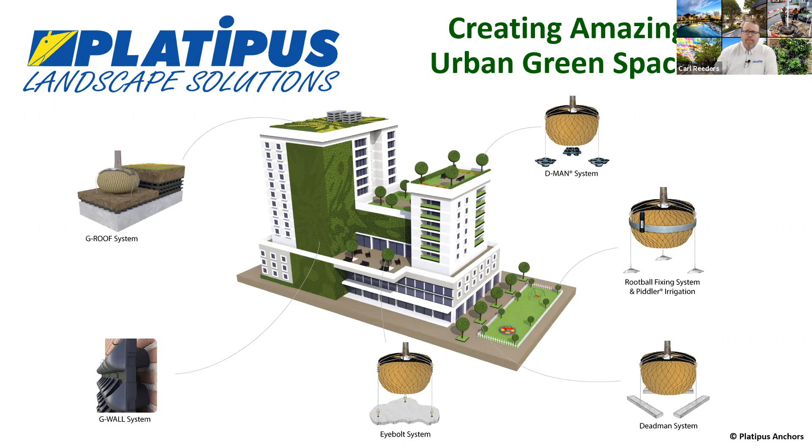I think what we'll do next is talk about who we are. Platipus Anchors started manufacturing anchors almost 37 years ago. We have a global presence all around the world, with offices in Germany and America, as well as distributors all the way down to Australia, Hong Kong, etc. We are an ISO 9000 approved company. We have a very strong relationship with our landscape industry colleagues. We believe very strongly in giving the very best support and workmanship we can, and we've hopefully carried that through into what we do and how we operate.

We won the Bali Service Award last year at the Bali Awards. We love and support Perennial, which is our chosen charity. We've also done good work with the guys at Veterans Growth, another fantastic charity. So we try to get involved and give back as much as we possibly can. We continuously innovate, and that innovation has recently brought forward, as I mentioned, two new products designed to help guys like yourselves make the best urban green spaces you possibly can.

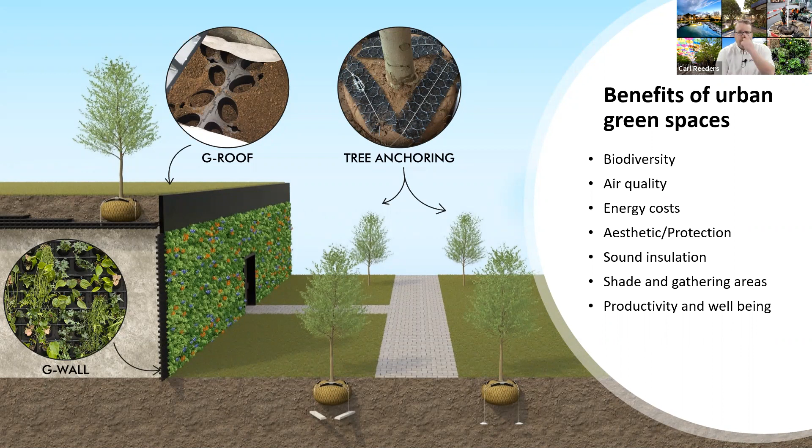Starting with G-Wall, it's a modular living wall system. The picture shown is a beautiful design from the winner of a competition we recently did, blind judged by Anne-Marie Powell, who we're very proud of our association with. It's a fantastic, lovely design, and the lady who did it is very talented. She's a remarkable designer, and we couldn't have been happier.

We came to design G-Wall after traveling extensively. We went to Singapore and saw how they had the mantra of bringing a city within a garden, as opposed to a garden within a city. They really managed to capture a natural biophilic design, and we thought, how can we bring that forward into the UK, into places like London? How can we assist with that?

Our conclusion was that we needed something everybody could use. We needed to open up the market, designing a simplistic, easy, affordable option so everyone can design their own green walls and access vertical green space. There are big, arrogant companies out there that control design, manufacture, installation, and maintenance. We said no, we need to give an option to every mom and pop shop around the corner who might want to do one green wall every couple of years. They need a solution they can access. Opening it up to everybody will hopefully improve our urban green spaces and give real solutions to people. The concept has been fantastic.

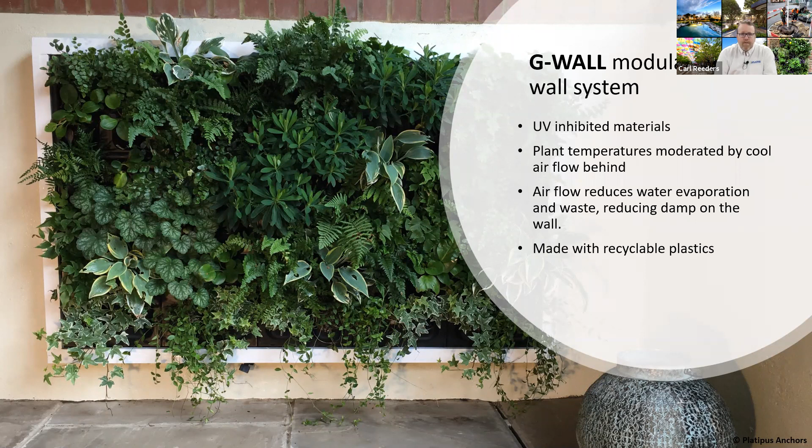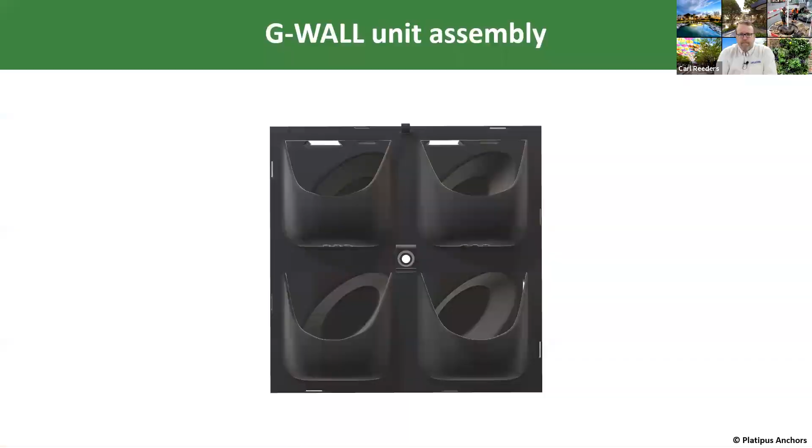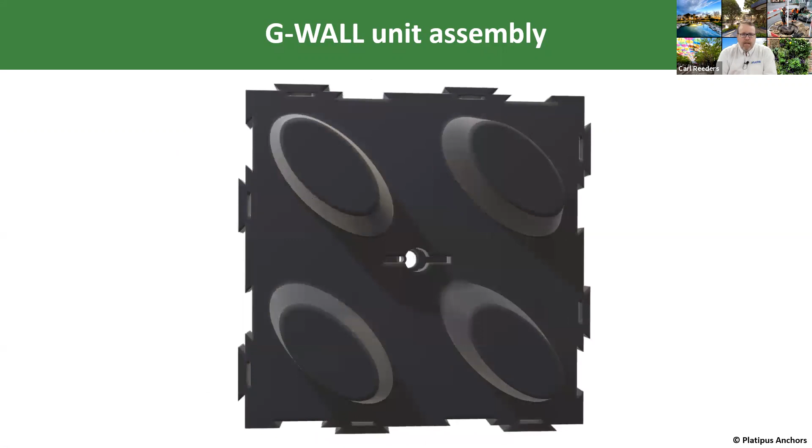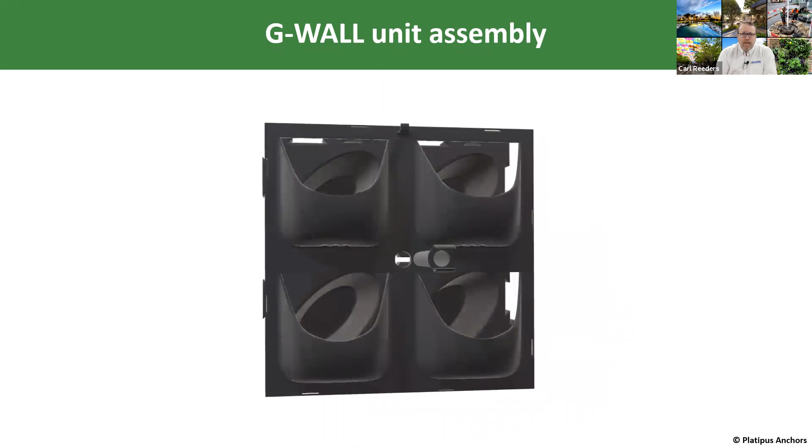This is the G-Wall unit, a simplistic piece. It embraces our D-MAN cell system, which is award-winning, for the backing plate. It's robust, made out of recyclable plastics, so it has that sustainability. It lasts incredibly long, designed to last. It takes a P9 to P10 size pot, about 10 centimeter pots, so you can really get in there and design some amazing things.

I think the best way to look at it would be through an animation to really give you the best feeling for it.

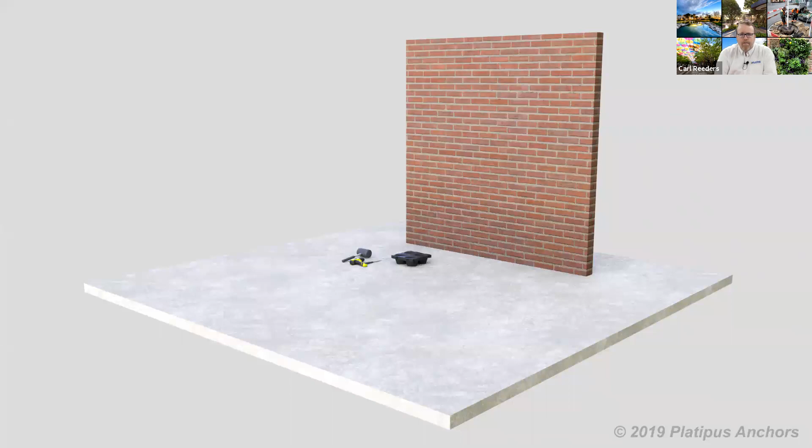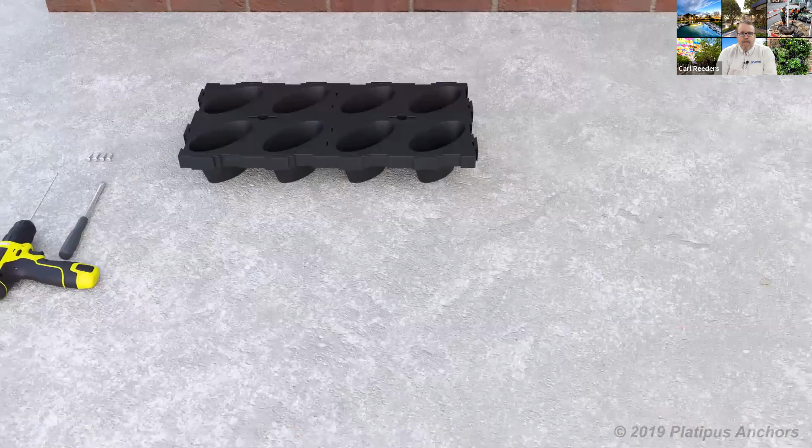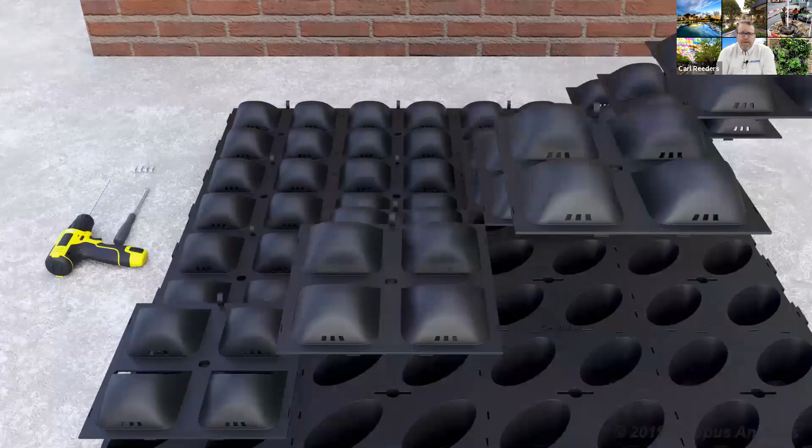This is a simplistic animation, but it does a good job showing what can be done. You've got your D-man cells, the backing plates, laid out and tapped together - very firm and snug fit. This is a square meter, which will have 16 cells, or 64 individual planting pots for your design. The fascia plate gets clipped on, and as you can see, there are drip-through holes allowing water to drip through into the preceding pots. The spigots go in, with two functions: one to hold the irrigation pipe, the other to attach the system to the wall.

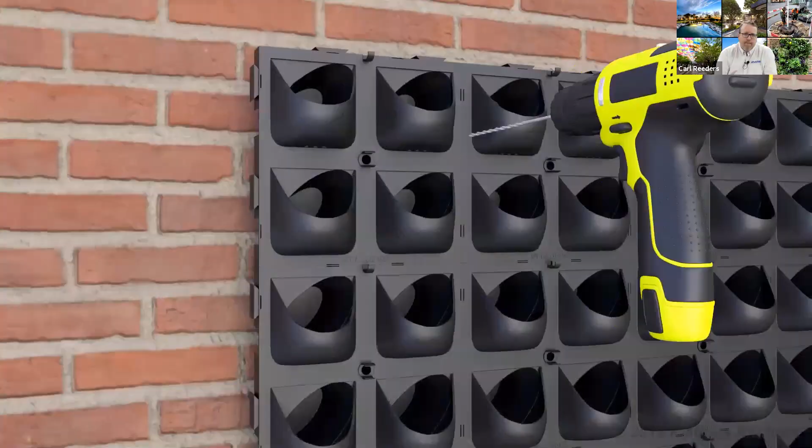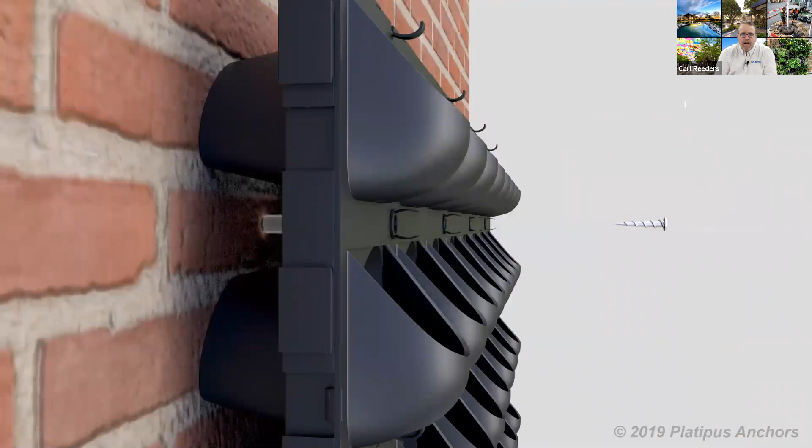It's important to note the system has no battens, rails, or hanging skeletons - it goes directly onto the wall. You'll see there's great space behind the cell, which allows for aeration and stops mold from growing on the surface. It's very simple to use. Those are the wall dog screws - very tough, with great load capacity, and they hold it snugly.

We don't supply irrigation because we want this to be a flexible experience for you, so you can go out and design your own thing. We give you the space to clip in the irrigation piping, but in terms of where and how you plant it, whether it's sun facing or in the shade, and what plants you use - that's entirely up to you.

As a result, the irrigation is not something we can supply. You'll need to do that yourself, but it's simple enough. I've done it, and I'm pretty useless when it comes to DIY stuff. It works easily, it works effectively.

So that's the G-wall. Very simple to install. Took me about 2.5 minutes to put up a square meter. Clips in nice and tight, as I said, and up it goes. Plant it on the wall if you want to, or don't. It's not that heavy either way. You can plant it on the floor.

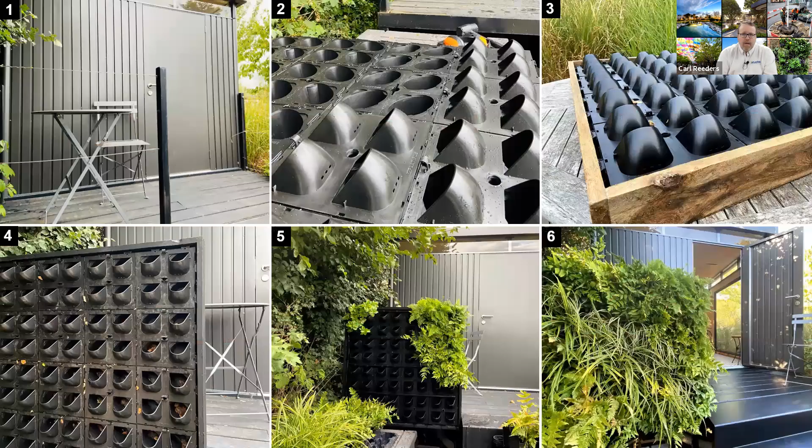Another simple example is from one of our fantastic design colleagues who did this G-wall you see in front of you. There were 6 steps she went through. She identified where she wanted to place it, built her square of G-wall, put a lovely frame on it, placed it up, and planted it. It was a superb design. She was another of our runner-ups in the competition, did a fantastic job, and took beautiful photographs of it. We're very proud of what she did.

All we do here, once again, is give you the plastic square meter or more, depending on how big you want your wall, and let you get on with designing your urban green space, because nobody understands urban green spaces better than you do. We're merely here to try and help by giving you products that are easy to use and reliable.

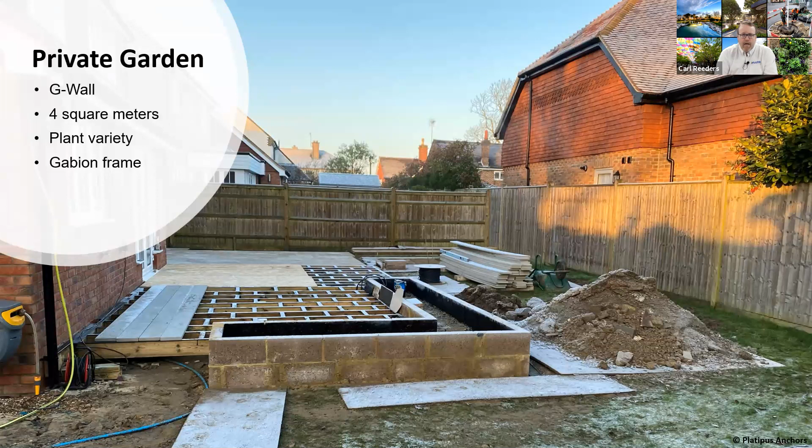One of our case studies was a private garden. One of the garden designers did a fantastic job. He took the garden - they wanted a nice centerpiece for the entertainment area. The customer chose a 4 square meter green wall. They erected it completely how they wanted to, on the floor. They put the whole piece together themselves, raised it up in one movement, and then planted it.

They put beautiful sidewall gabion frames around it. It just looks fantastic - it's the centerpiece. It attracts people, it's eye-catching. It really maximizes the space and gives a lovely center of attraction. It was a fantastic effort. The garden designer and contractor who did it is a fantastic talent, well known in the industry, and we couldn't be more happy with the work he did. It continues to be one of our favorite pieces.

We've seen future pictures and visited the site. The plants are well established, looking gorgeous, in great condition. So all in all, a fantastically successful piece. The garden designer is a real talent and a real treasure.

Right, moving off G-Wall to G-Roof. G-Roof also uses our demand cell as a basis. It is a structural and drainage solution. We thought about how we could really help people with their urban planting situations and roof gardens, and came up with this unique system. We think there's nothing else like it on the market.

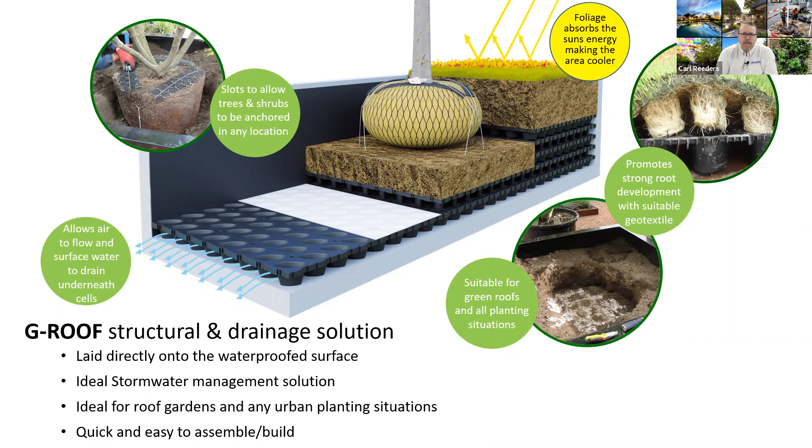It really allows beautiful water retention, as well as amazing drainage. It's strong, it's durable, and gives you really good load-bearing capacity. Each of those cells will take about 2.5 tons of compressive weight. It's just a quick and easy thing to install. I think what would really help you to see is if we showed you an animation.

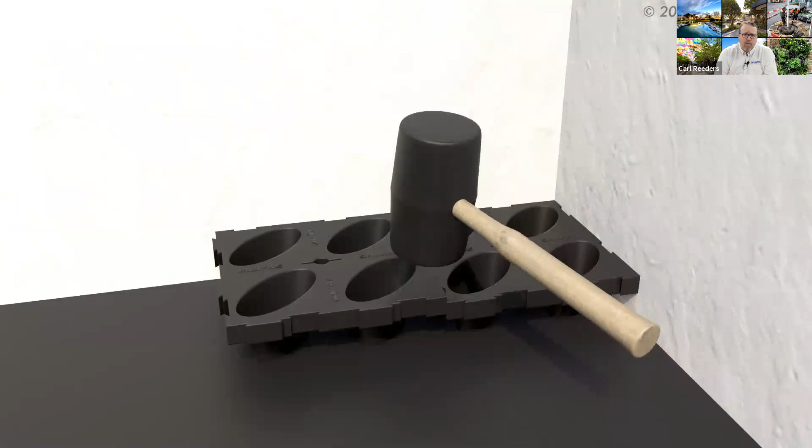The size of these individual cells is only 25 centimeters, so it allows you to really lay your floor to measure. It can use any of our D-Man Platipus anchor systems to go with it, so you can anchor your tree straight onto the drainage layer, which is completely unique. Once again, this is very strong - there's nothing like it on the market in terms of its strength and its capacity for water retention. It's an amazing piece of usage for this particular cell.

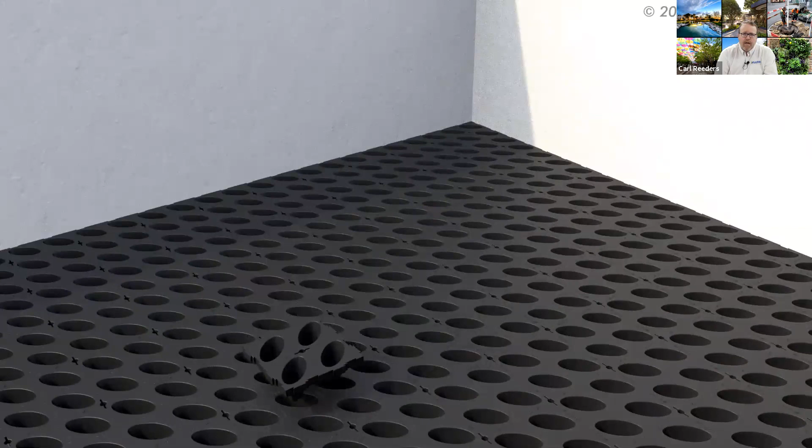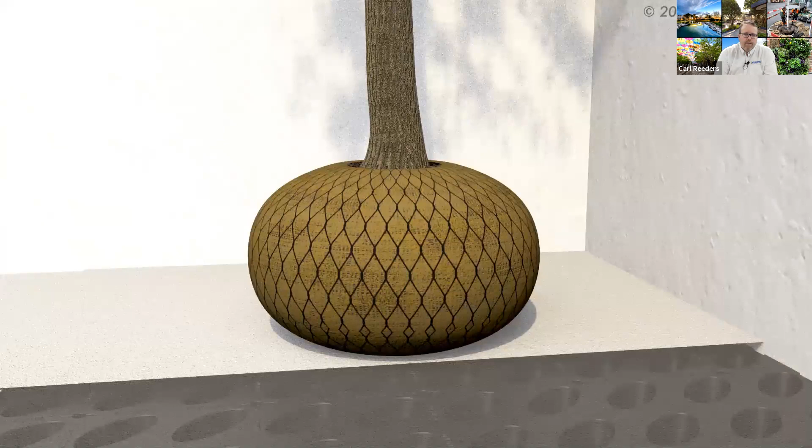You can turn them 90 degrees and they clip into each other. You can use them as a void filler - instead of using things like polystyrene, you'll get far more benefits out of it. You then put a geotextile, like a filter fleece layer, over it. And here comes a tree to show you how it connects in. Obviously, you want to anchor your trees if they're on a roof garden, or even anywhere in the urban environment.

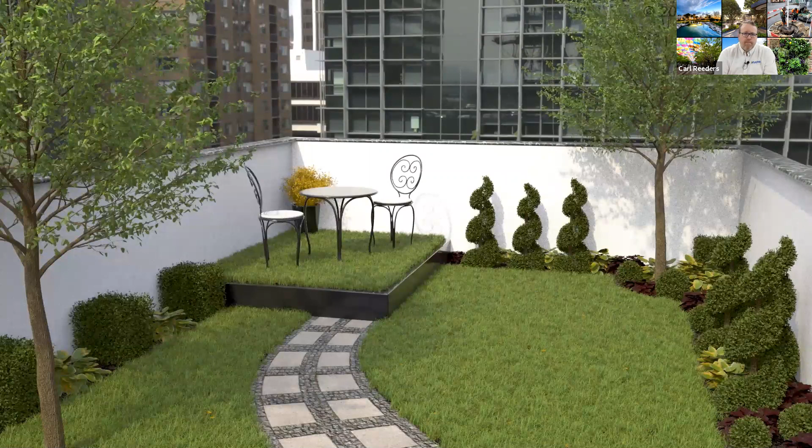Backfill, and away you go. So that is a unique system. There's nothing like it on the market. If you want to discuss more about it, please get in touch with us. It is definitely something worth discussing and discovering the potential. That is our G-Wall modular drainage solution for urban planting. It does amazing work with stormwater management as well. We're very proud of it, and happy to talk about it further.

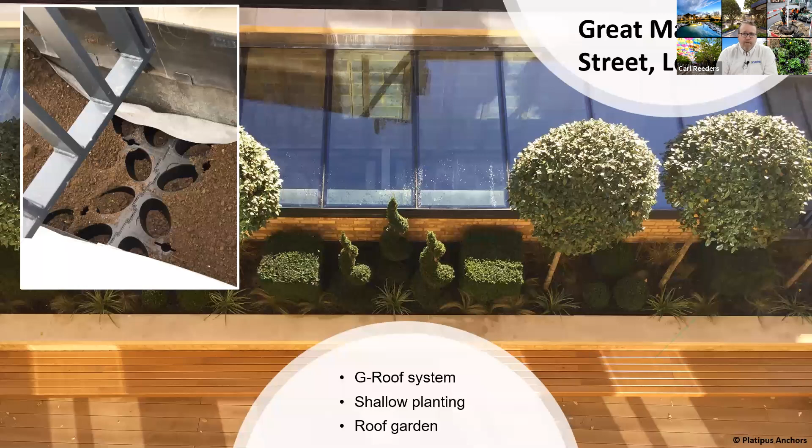This is one of the case studies we did, Great Marlborough Street. We had limited planting capacity. We needed to anchor the trees as well as provide them with drainage and support, so we used our G-Roof system all along the bed. The results were very good, very positive. The garden is still going strong, well established, and all in all, a positive case study we're very proud of.

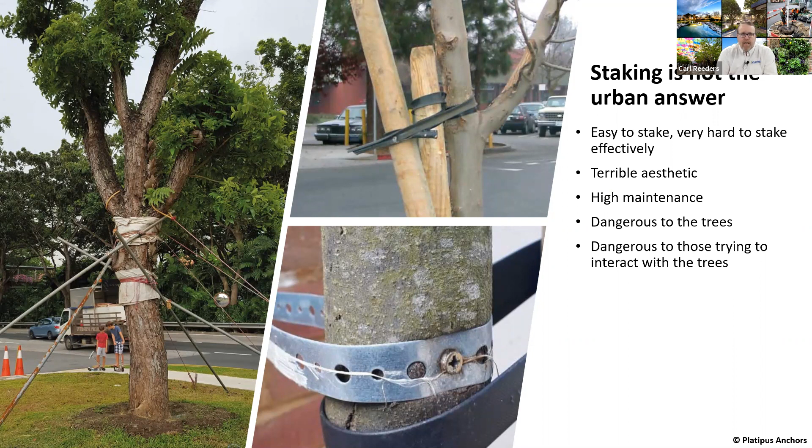Right, moving on to root ball anchoring. Now we've all seen staked trees. Everyone does it, very few people do it well. It's an incredibly high maintenance way of anchoring a tree. The aesthetic is horrendous, and the safety and security of the people around it and the tree are questionable. The number of times I drive past a tree that's been staked and see it hasn't been adjusted or maintained in ages - the tree has taken off, absorbed the rubber strap, or moved up and taken the center bar with it.

It's a horrendous way of anchoring a tree, and frankly, one of the main reasons why we designed the very first root ball kit all those years ago. We do it to get the fantastic aesthetic. We want fantastic safety and security for the tree as well as the people around it. We're looking for brilliant root establishment and minimal interference. These are all important aspects that need to be considered when you want to take care of that tree you're planting. At the end of the day, the results are far superior to any form of staking.

So if you're looking to anchor a tree in an urban environment, staking is not the solution. You want to be looking at root ball anchoring for all the maximum benefits, and to really maximize the benefits of that urban green space.

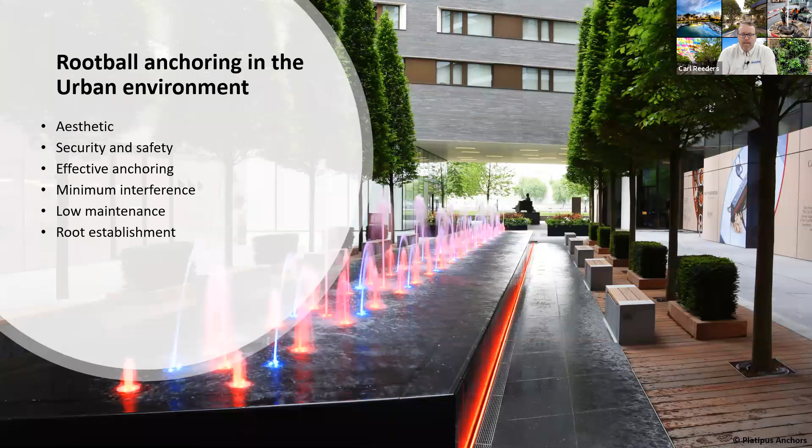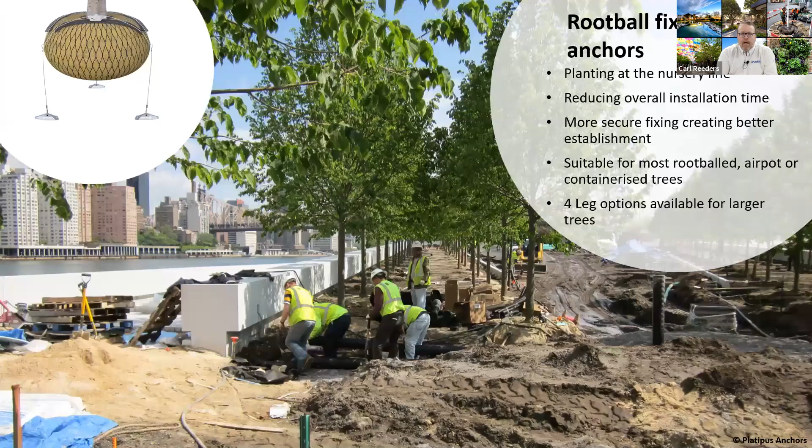Right, moving over to America, we've got the Four Freedoms Park. It's a delightful park in the center of New York, absolutely fantastic. We anchored this with our root ball anchoring kits - we drove in anchors here. It is an urban site, well used, documented on TV, etc. It's just a fantastic example of the type of aesthetic you can get from anchoring your trees by root ball. It brings me to our actual root ball fixing with anchors.

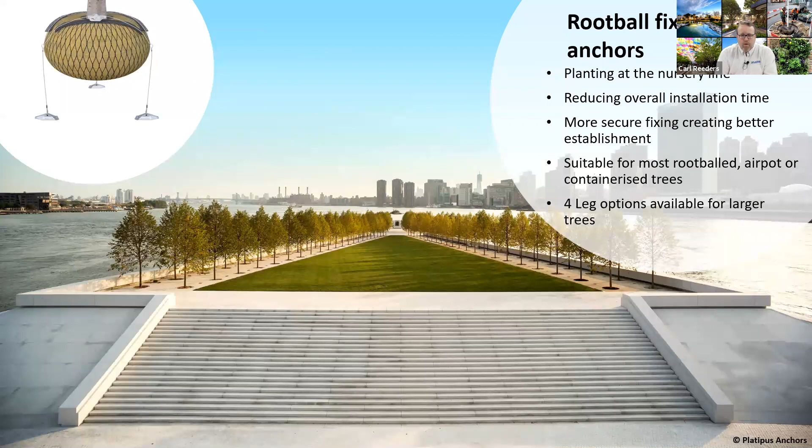There's some pictures of it being installed in the back there. These systems are our anchors with the best load - they're the best capacity for up to 20-meter trees. 4-leg options are no problem. You will get your best load with a root ball fixing with anchors. These are earth-driven anchors, percussion-driven, so they get driven down into the ground. They were our first type of anchor that we designed, and we have used them all around the world very successfully. It's what we're known for. It's easy to handle, and these are easy to install systems.

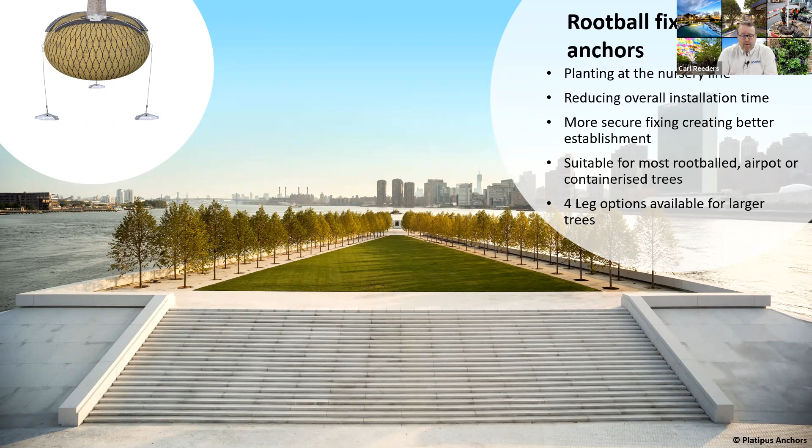They obviously then - we developed our strictly urban solutions from them, because we needed to do certain projects.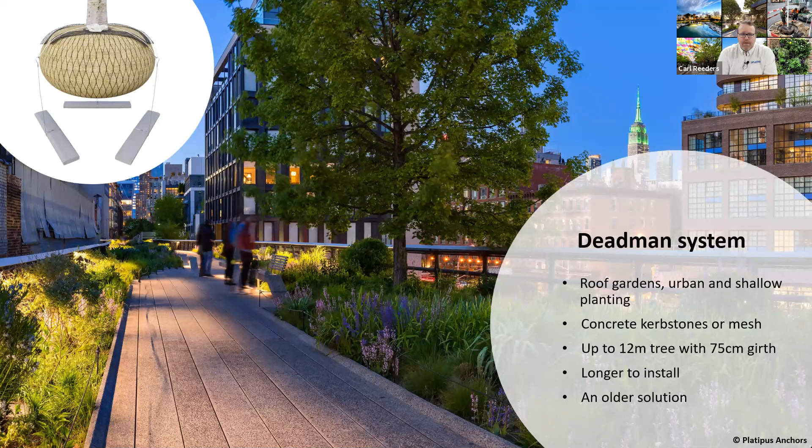Here you can see the Highline at night. We used, as I said, our dead man system. You can use it on trees. The slide says up to 12 meters, but we have had bespoke kits that go beyond that. You can use these systems pretty much anywhere. They do use concrete stones or curb stones and/or mesh as options, but that can be heavy and difficult to operate. It's also an older solution, and quite a bit more labor intensive when it comes to an urban solution. That being said, it is used all around the world very successfully, and we've had some fantastic projects with it - like there's another picture of the tree canopy at the Highline project, just offering you really fantastic place to get away, to focus, and to enjoy nature.

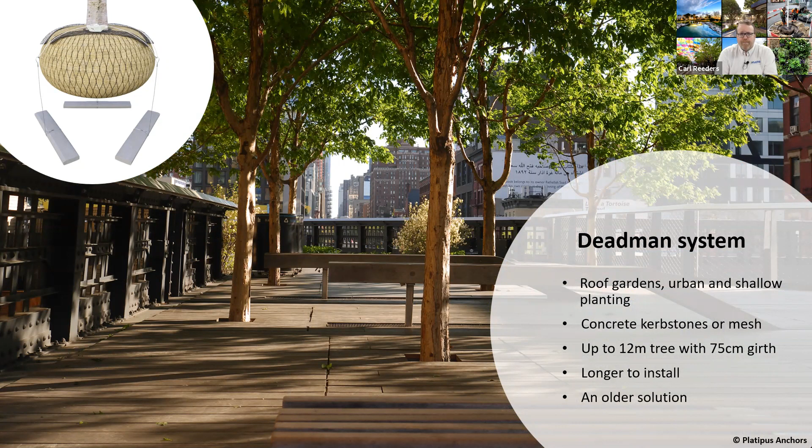The dead man and its limitations gave rise to our D-man system, which has become our preeminent urban tree anchoring solution, ideal for things like roof gardens or where you've got buried surfaces, shallow planting. It's a lightweight stackable cell - as you can see, it is the same cell we use on our G-wall and G-roof. It's quick and easy to use, less labor, faster installation times, good water retention for difficult environments. It's just become the preeminent system. And I think the best way to understand how it works is via an animation.

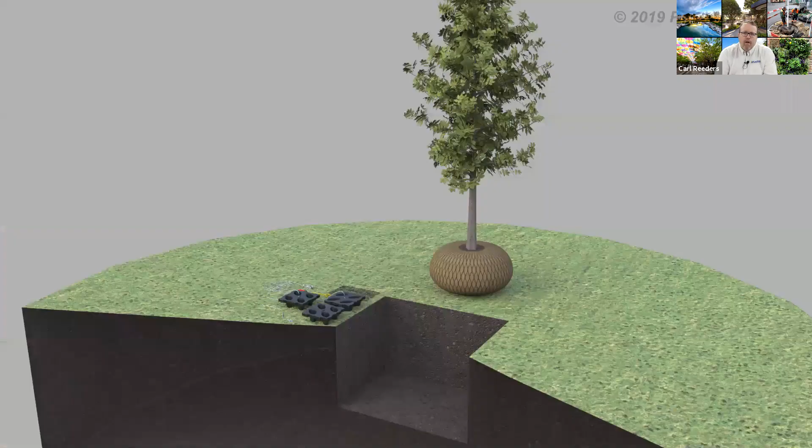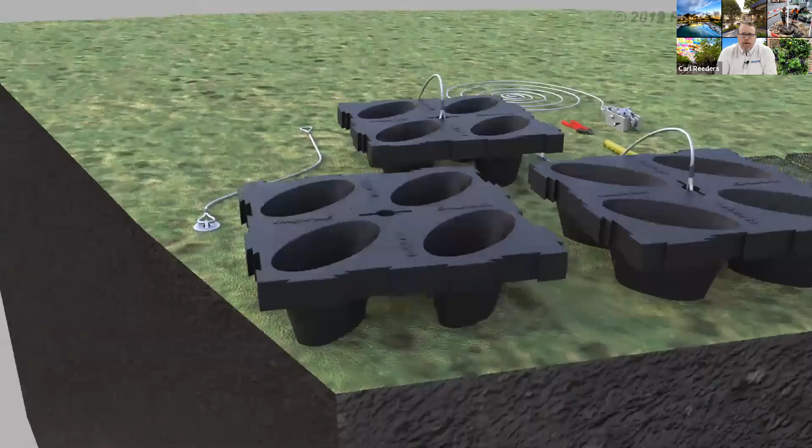So you've got your tree pit. Your anchor legs are inserted in a letterbox style, and they are placed around.

Now, what's important to note is, obviously I said shallow planting. This is also perfect for places where there's made up soil, so it's not virgin ground. You can use it there too. It doesn't have to be just the urban environment.

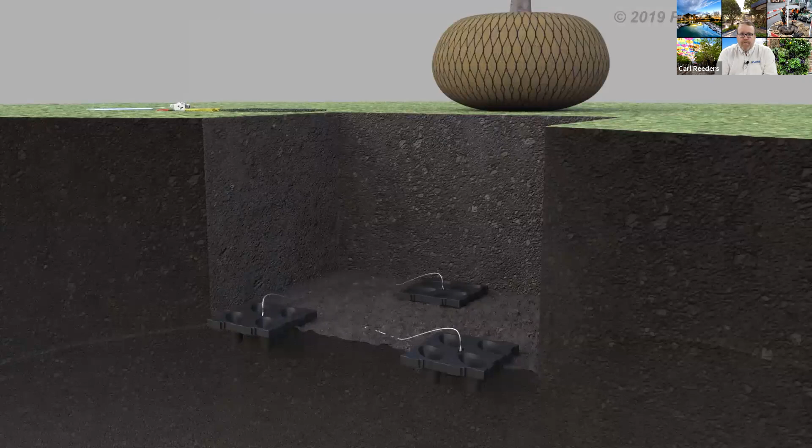The soil is put down. It's compacted by body weight. We don't want to over compact the soil, so you're just putting in enough weight that you can manage. Don't ever bring a machine in here to compact the soil. It's not necessary.

We're looking for 30 centimeters, or 300 mils, of soil between the cell and the base of the root ball. So it is incredibly shallow. Very effective solution.

You put your platimats down. Now the platimats are designed to protect the root ball. Your root ball is key. It's got to stay intact. It's got to stay well taken care of.

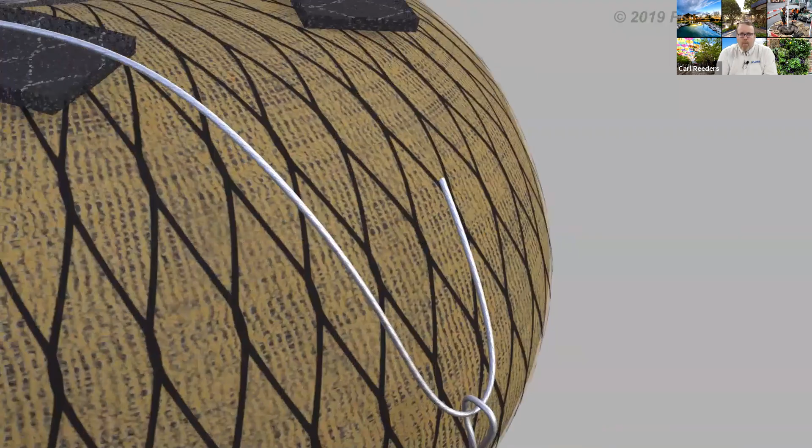So those platimats are just there to stop the load of the root ball anchoring system from in any way hurting the root ball. Our unique bidirectional ratchet system pulls from both directions, making sure that your load is even. This is ultra important to ensure that you get nice level planting.

You then ratchet it up using our special ratchet tensioner handles, which are very comfortable and easy to use. You get fantastic leverage on that ratchet. And if you're a small person planting and you're alone or whatever, it really does help you get the load you need onto those tree anchors.

In that position, you can now backfill. And that applies to any situation, whether you're planting into a planter or you're on a roof garden, it doesn't matter. That's how the system would work.

We've recently done a project completely out of the urban environment, but they've brought in made up soil, and that's where this also comes into its own. The earth-driven anchors I mentioned previously are not ideal for made up soil. They're more designed for the virgin soil environment, and these are perfect. You only need one tool as well, which is the little ratchet tensioner handle.

When it comes to other solutions, we have every solution you could require for an urban environment. Doesn't matter, you can go from eye bolts to mesh. It really doesn't matter, we need you just to talk to us.

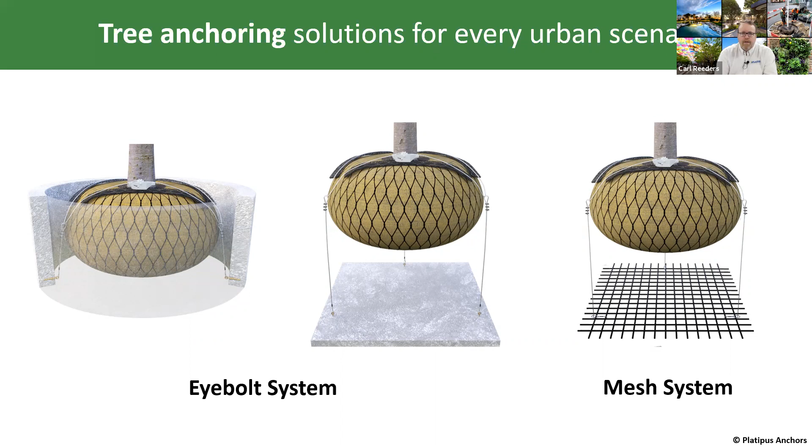This is another example of where we got involved and discussed the situation. Beautiful project, a post building in London, which is an old post sorting office. The multi-stem trees needed to be anchored effectively. We discussed it with the planter company that made the planters. They put in anchor points, and we provided the kits that allowed the trees to be anchored directly to the planter. The result is pretty good.

They put up green walls there too, which also added to the vertical green space. Keeping in mind they were working with an established building, I think they took that very concretey finish and really put some green in, which was a great effort and made it quite a nice space. So well done to them on that one.

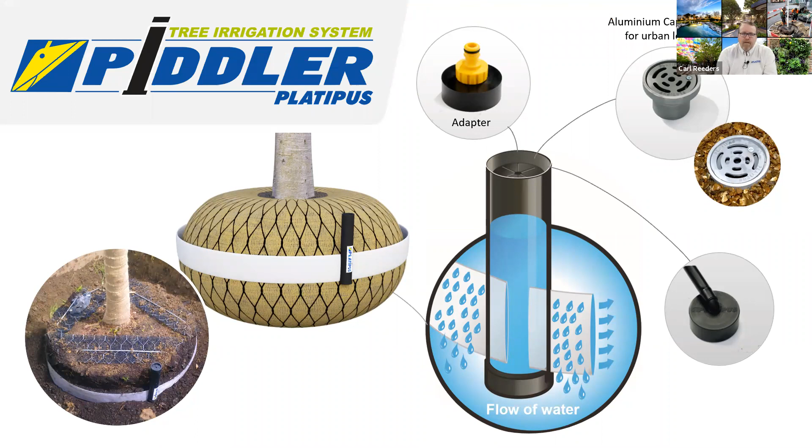Obviously, we mustn't forget Piddler. Piddler is our aeration irrigation system. It's nice and simple, offers 360-degree aeration. You've got aluminium caps for water runoff collection and for that lovely urban finish. It's a geotextile, so it kind of sweats the water out. That means you're getting a proper penetration around the 360 of the root ball.

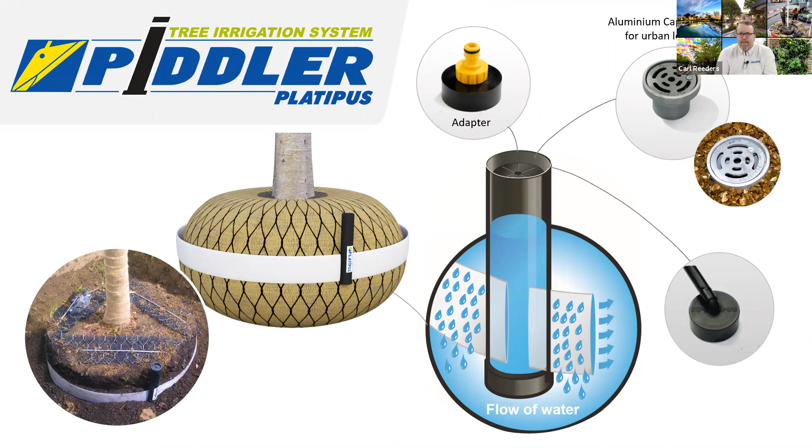It does about 100 liters every 10 minutes. It is gravity fed, but you can have a variety of adapters put on top. So it's nice and simplistic, easy to use. And I would recommend you don't forget your aeration irrigation when you're doing your trees. They will need it in the beginning while they're still trying to establish themselves.

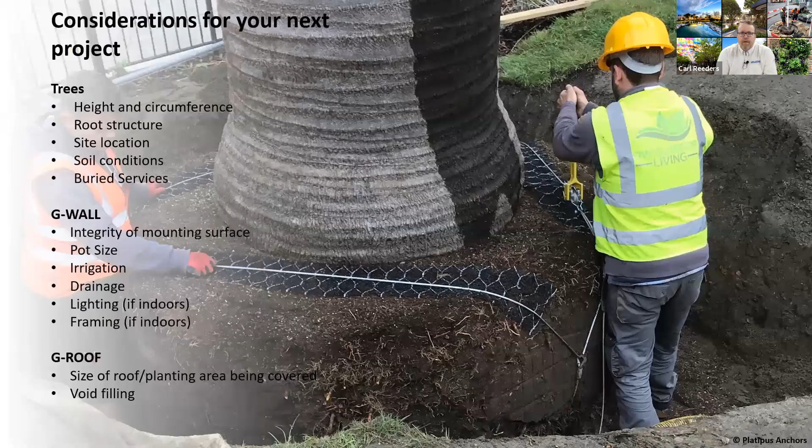Right, so considerations for your next project. When it comes to trees, before I carry on, you'll see what the guys are working on there.

That is one of the most fantastic palm trees I've ever seen, and I do a lot of work in the Middle East. This is a palm tree that grew up in the UK. What a fantastic beast, a nice, big, proud piece. We used it on the Packington estate. We have case studies if you ever want to see that. What a fantastic palm to anchor. The guys did a fantastic job, and that palm is just an absolutely beautiful piece. So if you're looking for the case study, do give us a call and we'll gladly send it over to you.

In terms of trees, you're looking for the height of the tree and the circumference of the tree 1 meter up from the nursery line. That will give us an idea of what size kit you require, so feel free to just come and talk to us about that. Soil conditions are important: is it made up ground, is it virgin soil? Buried services are important, and obviously the root structure. Is it containerized, air potted? How's the tree being grown? This will indicate where we should be advising you and what kit we should be recommending for you.

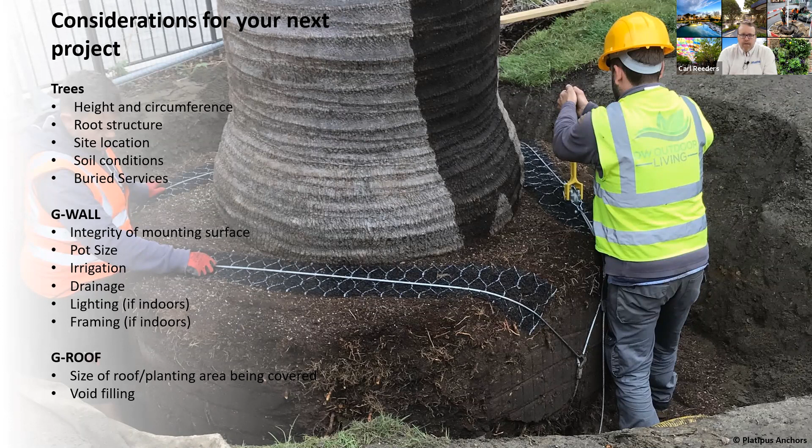In terms of G-wall, the integrity of the mounting surface is very important. But that doesn't always matter, as you saw from the shot I showed you earlier - the lady had a fence post with wire across, and she still managed to erect it. So it's really just about what you're prepared to do. But anyway, integrity of mounting surface is important. Don't forget, our pot size is 9 to 10 centimeters. Irrigation, drainage, lighting, etc - that's all up to you, that's how you want it to be. There are lots of great suppliers out there that can supply you those points and help you finish off your green wall.

In terms of G-roof, size of the roof and planting area is important, obviously, and are you going to be doing any void filling? Because how it stacks is important too. But if you've got any questions related to that, please do not hesitate to give us a call.

And that's what we like to do, guys - we like to get involved, help you as best we can, and let you create. We're not arrogant enough to tell you how to do it. We know you guys are fantastic and you'll manage just fine.